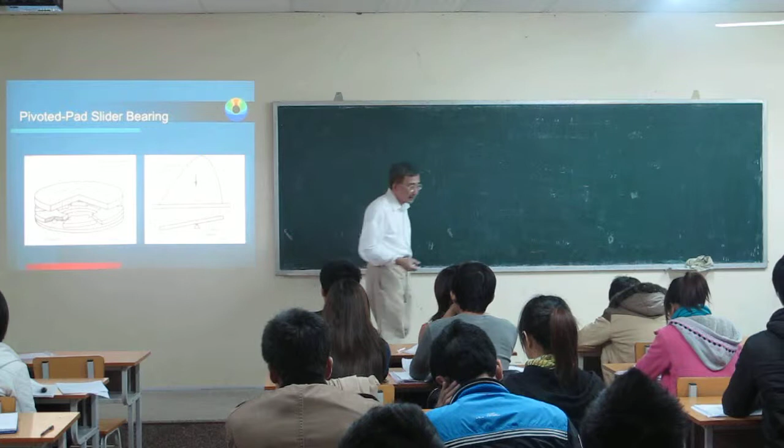The other thing is that sometimes the rotational speed may change direction. You may rotate it in one direction, but if suddenly you change the direction, the fixed incline has a problem adapting itself. But here, if you are working bi-directionally, if the direction can change, and you put this pivot point in the middle, then it can work both ways. So this provides lots of flexibility in application.

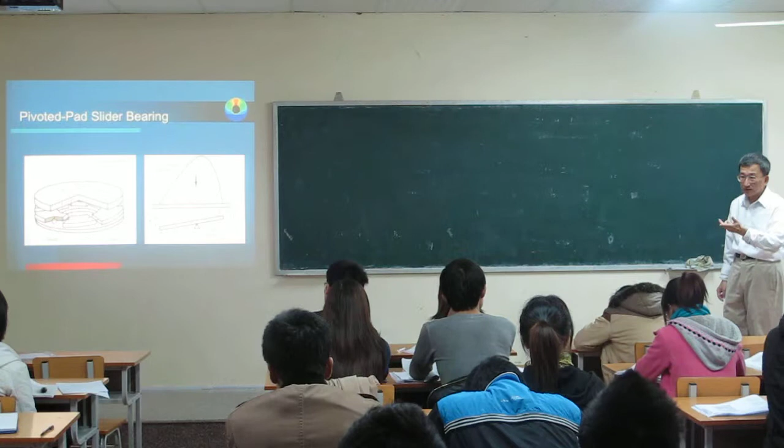This will create, I think, very dynamic moments in the environment. Yeah. So that moment, depending on how you look at it, is good because it's restoring. That moment is basically adapted to the load. Because you have this moment, the film thickness will change according to the load. So it provides some flexibility. But of course, there may be other things to consider.

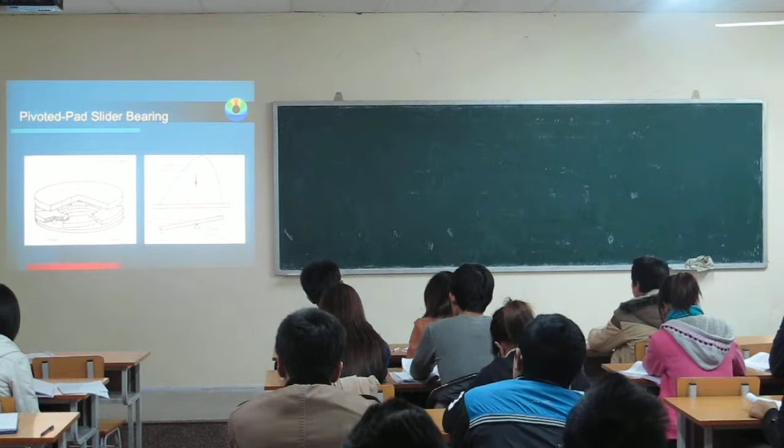So usually, if we are using this for unidirectional rotation, in only one direction, then the pivot point is usually located more toward the outlet. So usually it will not be on this side, but on this side. That will give the advantage. It provides flexibility and also stability to the operation, more than the fixed incline that we talked about yesterday.

When we look at the design procedure, it's very similar to what we did yesterday. There are two common tools we use. One is the diagram we call figure A, which provides viscosity as a function of temperature for different lubricants, for example these four types of lubricant, up to SAE 60. The other is table A. These two are always useful, whether it's a fixed incline or pivoted, because we always refer to them in our design calculation.

So when we start, we have to decide the geometry of the pad. Given the geometry, length and width, we can calculate the ratio, lambda. Just like yesterday for the fixed incline, once you know this, you choose your design criteria: do you want to design based on maximum load or minimum power consumed? Pick one of your design goals.

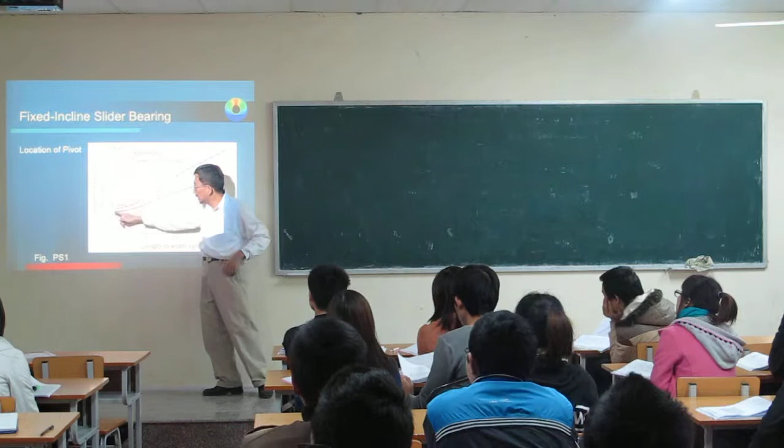Say for example lambda is 1, then you go up and read. If you design for minimum power consumption, that will give you the pivot location, S. As I mentioned, it usually will be 0.5 to 1, because usually it is toward the outlet. So first you have to determine the location of the pivot point.

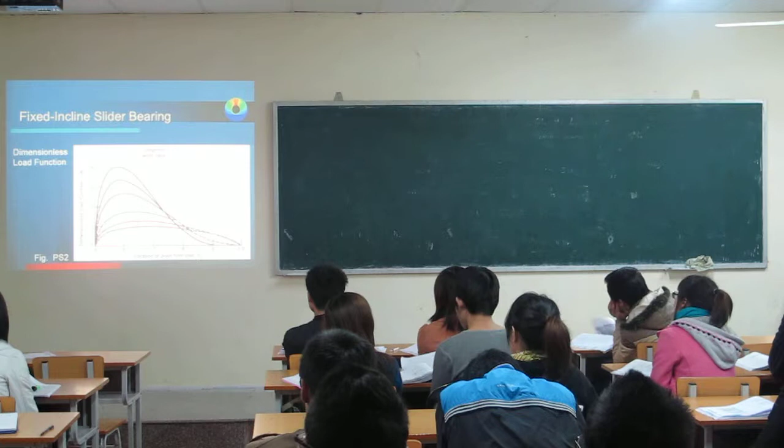Once you know that, next we determine the dimensionless load function. Now you know the pivot point, and this is given, so from here you find the dimensionless load, here in terms of the square root of the dimensionless load function. So if we outline this design procedure, you will see that first,

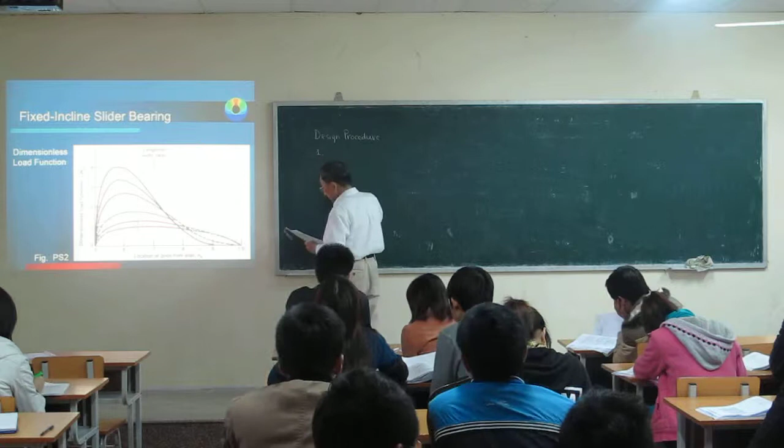the first step is to determine the location of the pivot, this S. To determine this, you need to know the pad geometry. The pad geometry is basically lambda, so you need to know the length and the width.

Then you need to know the operation requirement, which is basically your design goal. There are two: you want to design it for maximum load or minimum power consumption. This is your choice.

So now with this information, we can determine the location. What we use in this step is the figure I call PS1. PS, you know, there is a pivoted slider there. Alright, so this is the first step. Then once we know this, the second step is to determine the viscosity.

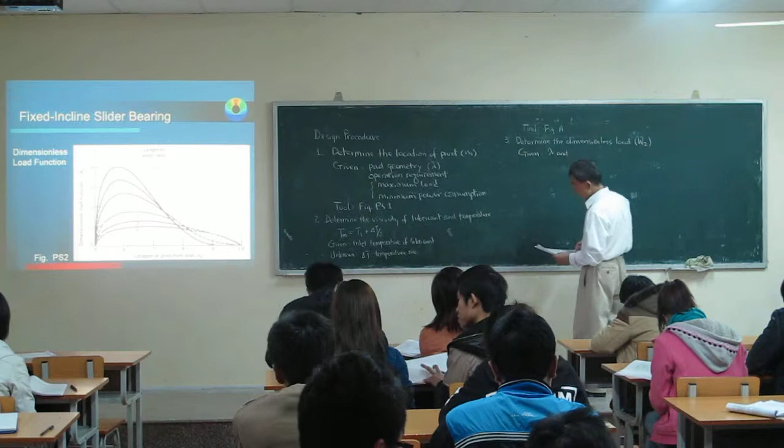And then the third step: once we know the viscosity, we can determine the dimensionless load. This is in terms of capital W Z. Here we use figure PS2 to determine it. In order to do this, we have to know the aspect ratio and the location of the pivot. These two have to be given, and the tool we use is figure PS2.

Because we defined this load in our previous calculation, you can see that inside it contains the film thickness. So if you know this, then we can calculate the minimum film thickness using H naught. H naught is capital H naught times L, and then we have the dimensionless load times the viscosity times the velocity.

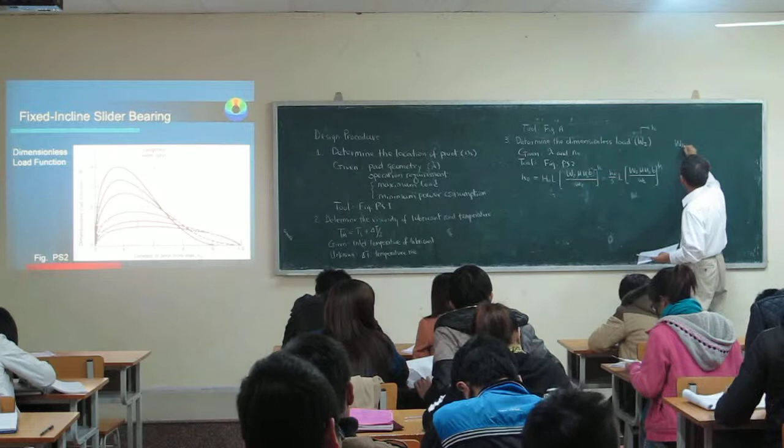If you go back to the previous page, you see the definition of how we normalize the normal load, WZ. I believe it is the square root of mu, V, and something else I cannot remember. So you can check the note where we define it. Anyway, what is inside is the film thickness.

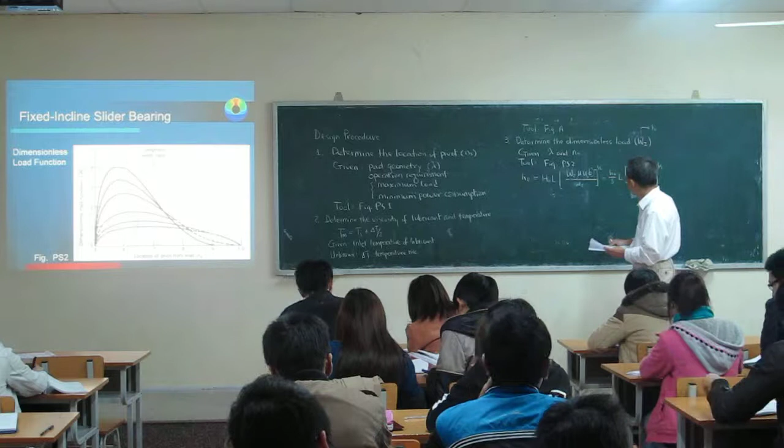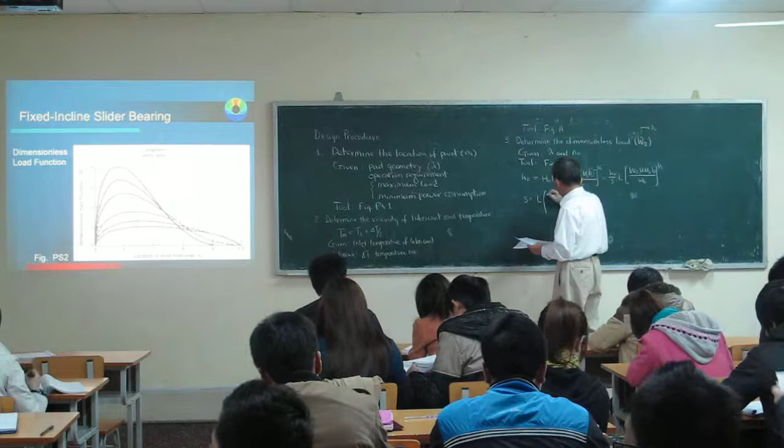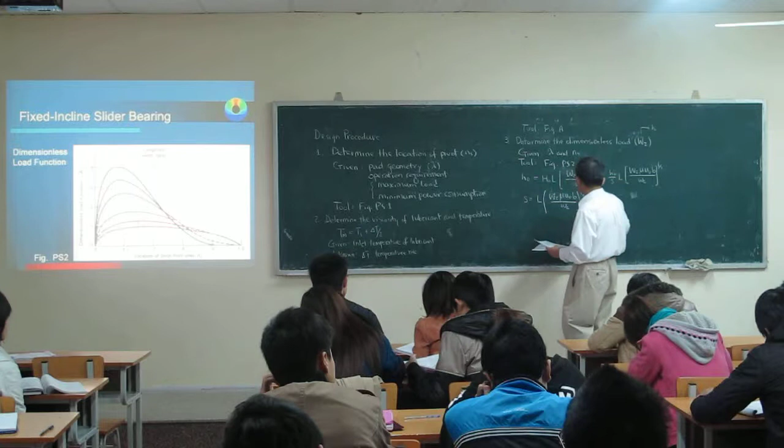So from here we can calculate S. S can be calculated as L, then WZ over mu times U naught, then to the 1/2.